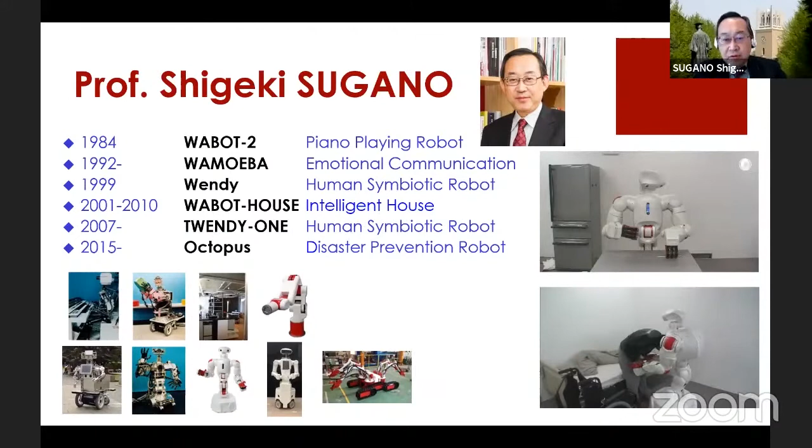I have developed so many human symbiotic robots so far. Now, in the Moonshot project, I will make a great jump from these kinds of robots.

As you know, there are so many kinds of goods - cellular phone, camera, game machine, PC, etc. But now we have the smartphone. In the case of robots, it's the same situation. Now we have many kinds of robots, but in the near future, by 2050, we will have some smart robot.

So we now set the autonomous level for smart robots. As you know, in the automobile there is autonomous driving, with levels 0 to 5. In autonomous robots, it's almost the same situation - level 1 and level 2 are routine autonomous, cooperative autonomous, semi-autonomous, and fully autonomous.

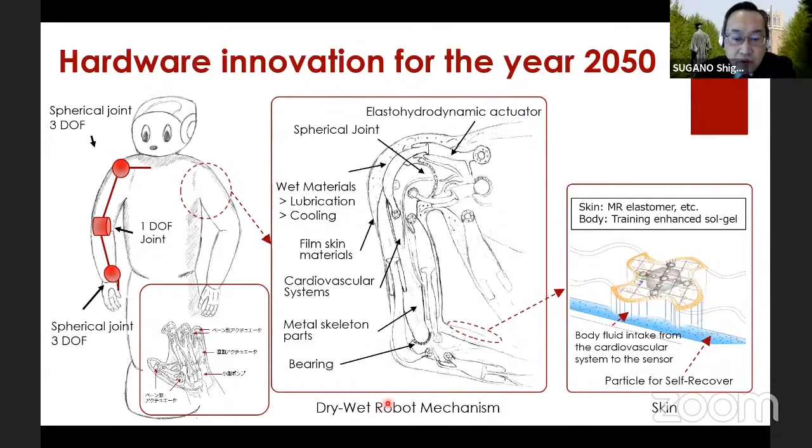So about the hardware innovation of the year 2050, it's an example we are now designing. It includes an elastohydrodynamic actuator and spherical joint, wet materials, probably including some elastomer, and it's some self-recover system. It's also included - we call it a dry-wet robot mechanism. Conventional type robot is all dry robot. Now we realize a dry-wet hybrid robot mechanism.

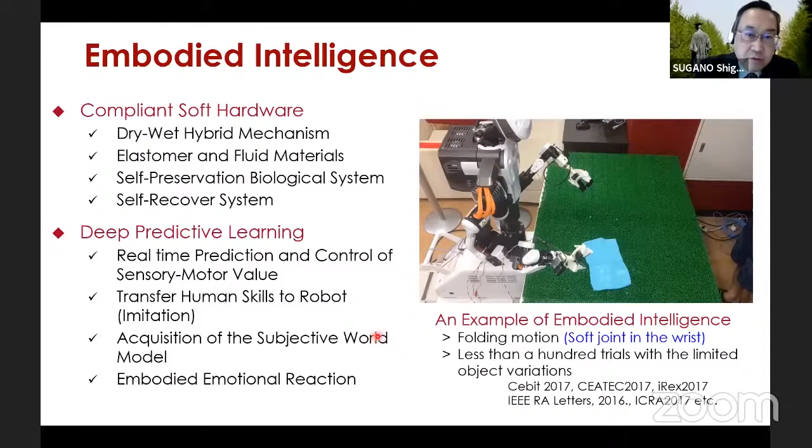There is an input of sensory stimulus, and it makes a prediction error. But the main point is this hardware system. So finally, probably it makes here the self-preservation biological system, and deep predictive learning is combined. Then we can bring the new AI embodied intelligence.

The another important point is evaluation of social needs and acceptability. Now it is very difficult to have field experiments all over the world, so there is a limitation that specific robots or experiments happen in specific regions only. We should have discussion on international standards, but that is now rare. So this is a problem now.

So we try to realize this process by 2023, to understand needs for standard design. It's a quantitative survey - a comparison survey from 10,000 young people, Generation Z in Europe, US, and Asia, and we try to cover 3 to 8 countries. This is a very important investigation to identify what is important to design the new AI robot. By 2025, we get feedback and hold the international symposium on AIREC. By 2030, establish a path for social implementation, including international cultural differences. Then we bring this knowledge and experience to reflect in the design of the AI robot AIREC.

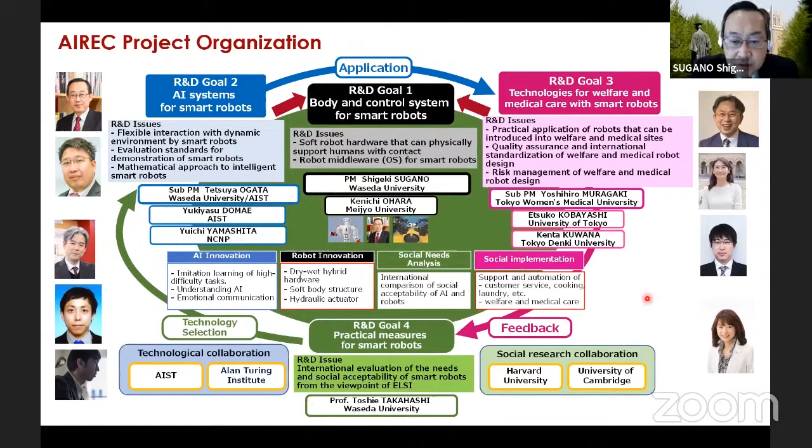So please see this slide. There are AI innovation - robot innovations, social needs analysis, and social implementations. So that is a plan toward 2050 in the hardware innovation, social implementation, and social survey. So that's all. Thank you very much.

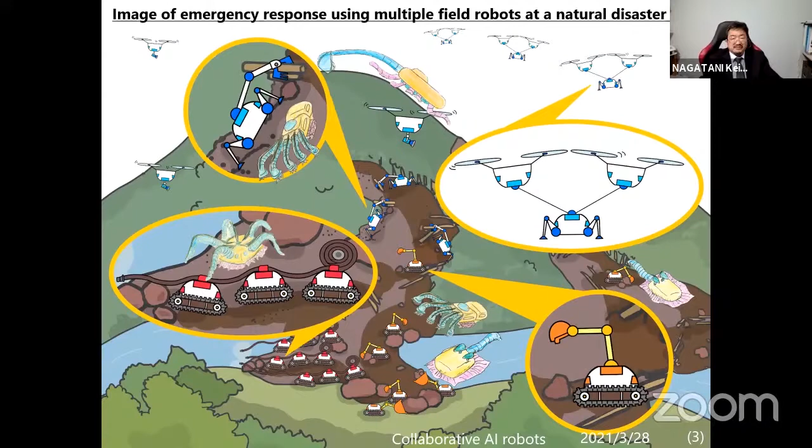This illustration shows an image of emergency response using multiple field robots at a natural disaster site in 2050. Robots obtain sensing data to understand the environment, conduct collaborative works to respond to unexpected situations, and perform disaster response.

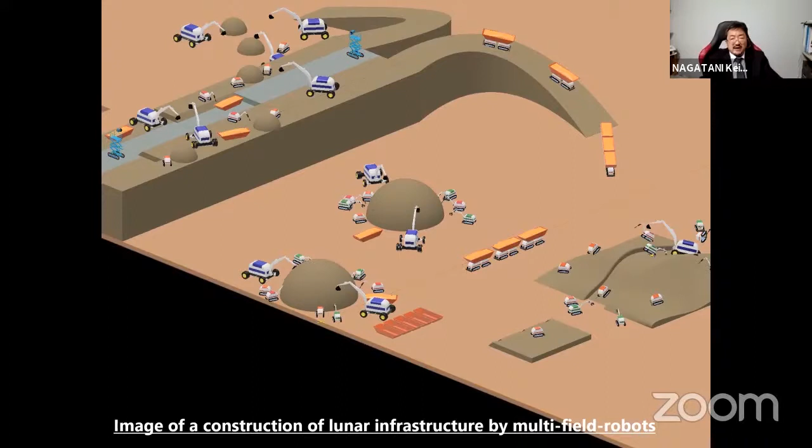This illustration shows an image of infrastructure construction on the moon in 2050. Multiple field robots autonomously perform collaborative work to build infrastructures while responding to unexpected situations.

I would like to explain a little bit about the difficulty of realizing field robot systems. In current mainstream approaches to robot design, firstly the situation, or environment, is assumed. Then the hardware and software are designed according to the situation. After the robot is deployed in the target environment, it executes the task by optimal motion planning.

During the execution, the robot obtains sensing data and adjusts its motion to perform the task robustly. We call this approach closed design. This approach is effective for robots in factories, and the application of the robot is expanding in the world.

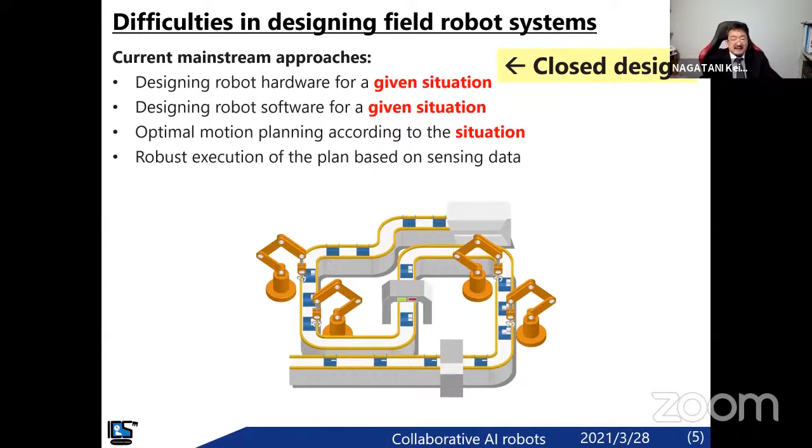On the other hand, this approach does not work well for field robot systems in case that the target environment is a disaster site or even a construction site. According to this approach, it is necessary to design the hardware and the software for all possible situations. After the robot is deployed in the target environment, it executes the task by planning result according to the situation.

The key is to understand the situation by robots in an ever-changing environment. During the task execution, the robot's motion should be conducted based on sensing data. However, in the field, much higher sensing ability is required than in a factory. Therefore, a robot with a closed design is expected to fail.

That is because it is difficult to predict the boundary conditions of the target environment at the robot design phase. Therefore, the design problem is not closed. In the design issues for disaster response, the time, place, and scale of the disaster cannot be determined. It is difficult to grasp the situation because of an ever-changing environment. The solution is not simple, and there is no right answer.

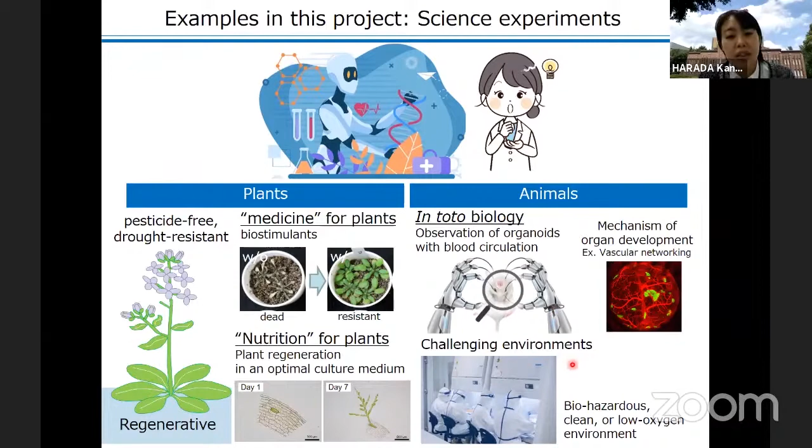And for the animal study, we propose in toto biology to observe organoids, the small mini human organs, under blood circulation condition, to study the mechanism of organ development or the development of new medicine in a challenging environment like a biohazardous environment, super clean or low oxygen environment.

So in the next 10 years, we are going to develop a science AI robot team for science experiments on plants and animals in a challenging environment.

Let me summarize the challenges for this science AI robot team. First, it should work in a challenging environment where people cannot stay or do not want to stay long, like a biohazardous clean environment. We expect large individual differences in samples, and manipulation adaptive to changes in the samples or environment is required.

It's often true that the number of available samples is limited, and we need to discuss ethical issues, in particular for experiments on animals. It's also often true that only a limited time duration is allowed for experiments on plants and animals. The robot needs to manipulate small, soft, and deformable samples in a wet condition. And scientists often use qualitative metrics for evaluation, like 'it's good' or 'bad' or 'terrible'.

Looking at these items, we notice that they are not only for the science AI robot, but are common in many robotic applications, including the surgical robots I have been studying for years. So let me discuss a little bit more in detail.

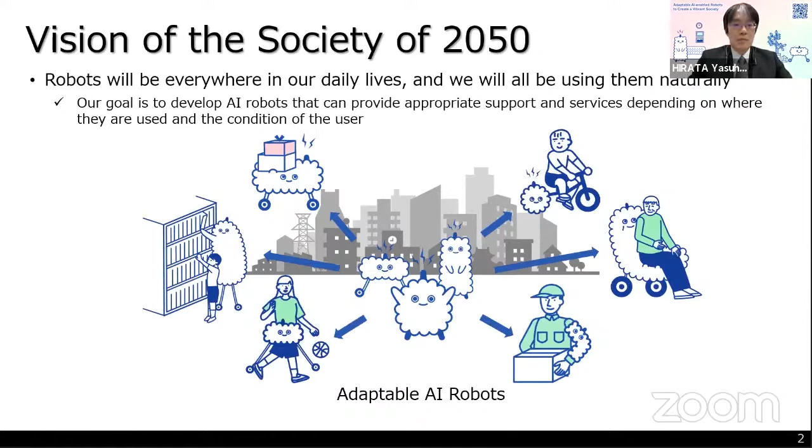Adaptable AI robots will be used not only in homes, but also in commercial facilities, cultural facilities, sightseeing spots, sports facilities, nursing homes, hospitals, child care facilities, and many other places as part of the infrastructure of society. We aim to envision a smarter, inclusive society where everyone lives a healthy life by coexisting with AI robots, a society cultivating the feeling of 'I want to do' or 'to be' something, and fulfilling it using AI robots.

So in order to realize a new life with AI robots, we have set up 3 major research topics. The first is AI-related research to design how robots should behave in order to provide appropriate assistance and services to humans. The second is research on robot hardware to provide safe and appropriate assistance to humans. The third is research on social implementation, where AI and robot hardware mutually evolve and AI robots can be used in everyday life. So today, I'd like to briefly introduce these 3 research topics.

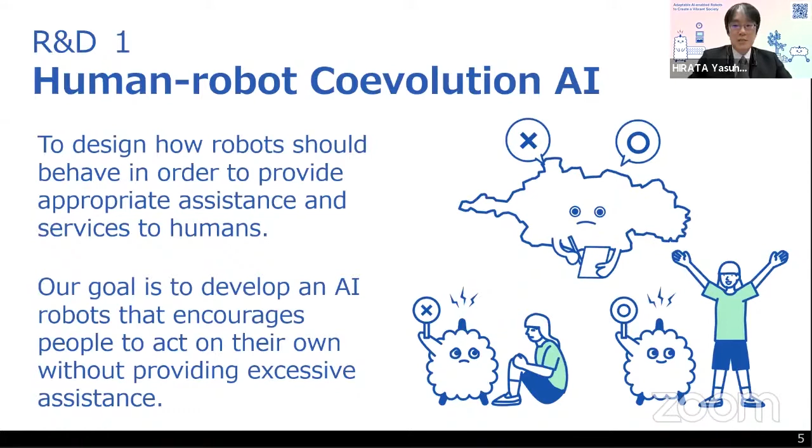So first, I'd like to explain our research on AI to design the behavior of robots. Our goal is to develop AI robots that encourage people to act on their own without providing excessive assistance. For this purpose, we focus on the concept of self-efficacy in this project. Self-efficacy is the expectation of how well you can perform actions necessary to produce a certain result, and the recognition of the possibility of your own action.

If self-efficacy is low, a person hesitates to try new things, thinking that I cannot do it, or that I might cause trouble for others. On the other hand, if self-efficacy is high, a person tries new things, thinking that I can do them by myself. The aim of this project is to find out a mechanism of change in self-efficacy, feeling like I may be able to do it, or I will try it. Along with this approach, we aim to set appropriate goals for each task for improving self-efficacy and to design behaviors of AI robots.

There have been several studies on improving self-efficacy, but most of them focus on short-term human observation and assist, dealing with limited tasks. On the other hand, we want to develop an AI robot that can improve self-efficacy through long-term observation of the user and encourage him or her to take on new challenges.

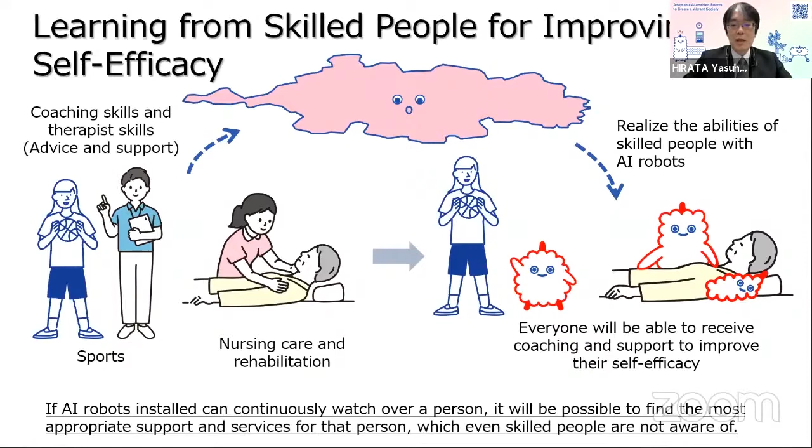Furthermore, if multiple AI robots installed in various places can continuously watch over a person, it will be possible to find the most appropriate support and services for that person, which even skilled people are not aware of.

The second research topic is the hardware of adaptable AI robots. Our robots are designed to provide services to people of all ages and physical condition, and to be adaptable for many purposes. In order to achieve this goal, a single robot with a fixed shape may not be able to provide sufficient support. Therefore, we aim to develop adaptable AI robots that can change their shape and form according to the user's condition, environment, and the purpose of the task, and provide appropriate assistance to encourage the user to take independent action.

So in this project, we propose a new concept called robotic nimbus. You may be familiar with the flying nimbus, which is a cloud-type flying vehicle that appears in the Dragon Ball manga. The word nimbus means a splendid atmosphere or aura surrounding a person or thing. The concept of our proposed robotic nimbus is to assist the user's proactive actions naturally while transforming into various shapes like a cloud and gently enveloping the user.

Although we would like to develop various robots based on the concept of robotic nimbus in the future, first of all, we will develop nimbus holder, nimbus wear, and nimbus limb. The nimbus holder gently and firmly supports humans, aiming to support stable movement by restraining the movement of upper and lower limbs, and to support walking and standing of people with lower limb disabilities.

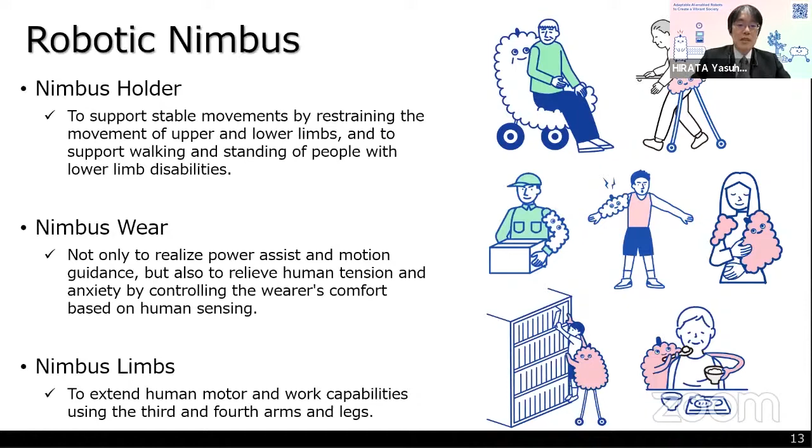So currently in Japan, the concept of a future society called Society 5.0 is being proposed. Society 5.0 represents a society in which cyberspace and physical space are highly integrated. While cloud computing in cyberspace is progressing, we aim to realize a cloud that enables safe and secure interaction in physical space, that is robotic nimbus, as a social infrastructure.

So finally, the third research topic focuses on how to implement the proposed adaptable AI robots that improve self-efficacy in society.

So in order for AI robots to be accepted by humans and society, it is important to obtain a social consensus on how to control the robot from the perspective of ethics and law, as well as personal information protection. It is also necessary to establish safety evaluation standards for adaptable AI robots so that all people can use them.

In addition, the fact that AI robots are installed everywhere as part of social infrastructure means that people don't always use the same AI robot. We aim to develop technology to share the experience of user-AI robot interaction with other AI robots, so that even if the AI robot has a different form or function, the user can recognize it as a usual AI robot that knows him or her well.

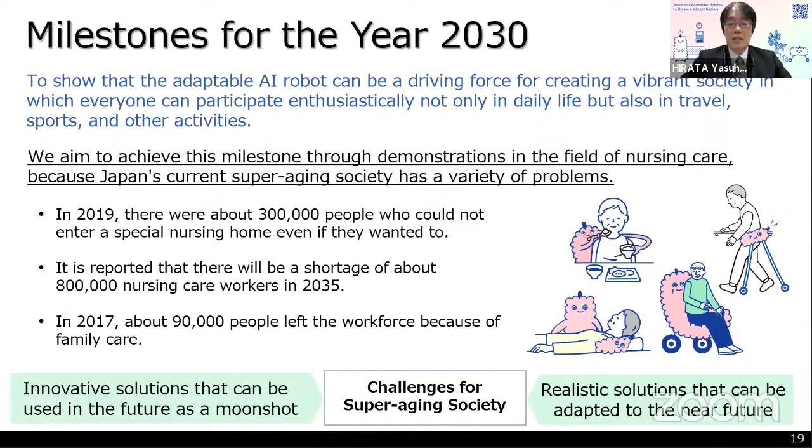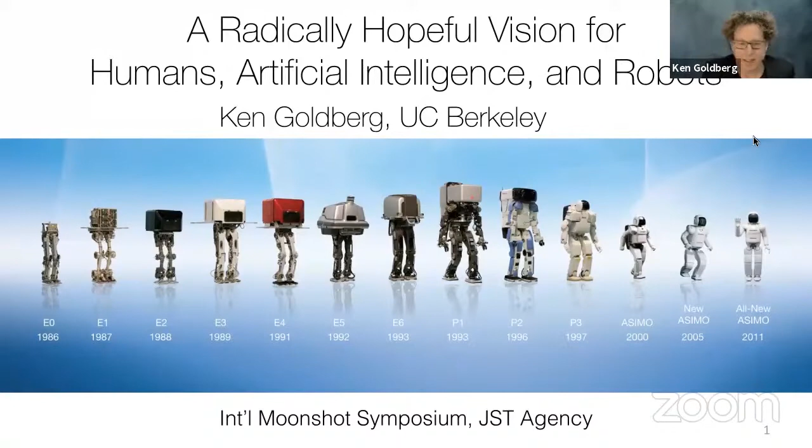Thank you, it's a pleasure to be here. Can you hear me okay? Can you see the slides? Yes, please. Okay, very good.

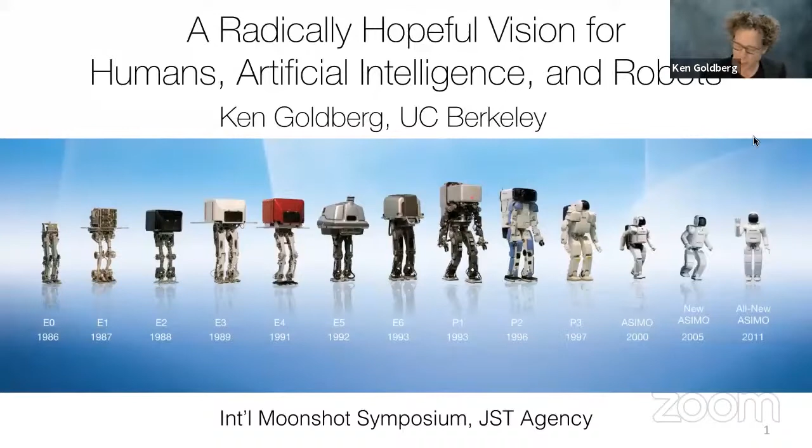So what I'd like to do, in honor of this wonderful kickoff of this new program, is to talk about what I believe is a hopeful vision for humans, artificial intelligence, and robots in the year 2050. This evolution has been going on for many years. In fact, this year we're celebrating the 100th anniversary of the word robot, which was coined in a Czech play in 1920. And as other colleagues have mentioned, there's been enormous progress.

In fact, in the last decade, work on deep learning has made a major advance in artificial intelligence, and it's due to massive data sets, computing, and new algorithms under the title of deep learning. Everyone's aware of the major result when the system AlphaGo beat the world champion at the game of Go, and it was hailed as a major breakthrough.

It's also important to remember that this was a very complex game with a very large branching factor, but it's also a game, meaning that there is a lot of complexity, but the state of the board is fully observed. It's known perfectly. It's a 19 by 19 grid, and it's a trinary state environment, so each cell is either empty or has a black or white stone.

So we know exactly what the state of the system is, and it's stationary. It waits for the opponent to make a move.

I want to contrast that with the complexities we're talking about today, which is the real world, where we have vast amounts of complexity, where the environment is much bigger than a 19 by 19 grid. The complexity of each cell is far more than just trinary, and the system is dynamic and highly uncertain. So it's really important to keep in mind that games are not reality, and reality is still a very, very difficult objective.

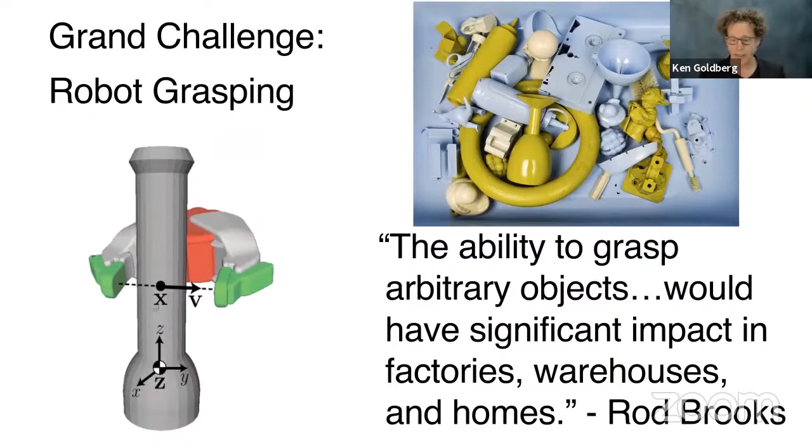Now, there have been major advances in computer vision. We can now see things, robots can now see things that they couldn't before, and this has been very, very exciting. The ability to label objects was largely due to the existence of data sets, very large labeled data sets in computer vision.

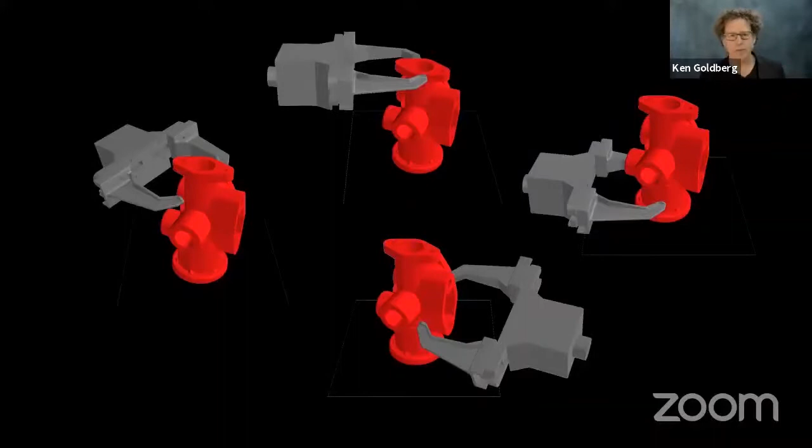So we've been looking into the analogy of: could we come up with very large data sets of labeled objects for grasping? This is the idea behind the dexterity net, or DexNet—not ImageNet, but DexNet—that my students and I have been working on. The idea is to mathematically study each of the objects in that data set, then look for optimal grasps that are robust to small perturbations, the inevitable uncertainty in position, orientation, and uncertainties in the mass of the objects and the friction properties.

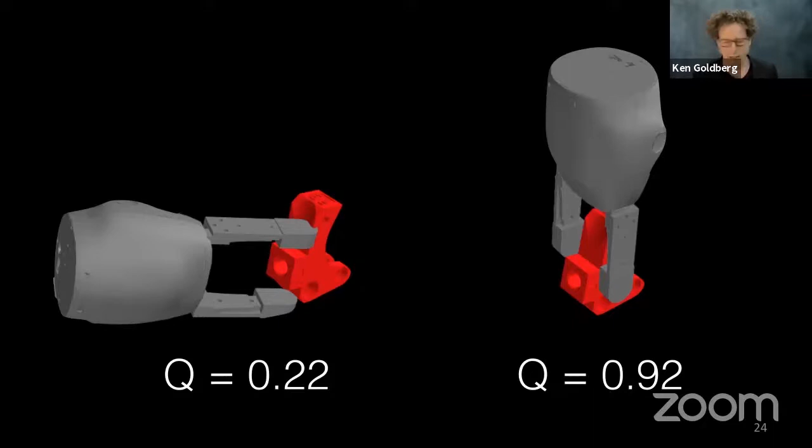We can use Monte Carlo integration to take all those samples in simulation and come up with predictions of how reliable different grasps are, how robust they will be in practice. The one on the left is not very robust, the one on the right is much more robust. This is the result of our system.

It's been running on a number of different scenarios. These are objects it was not trained on, but using deep learning, it has been able to generalize and pick up new objects with very surprising degrees of reliability. This is DexNet in action.

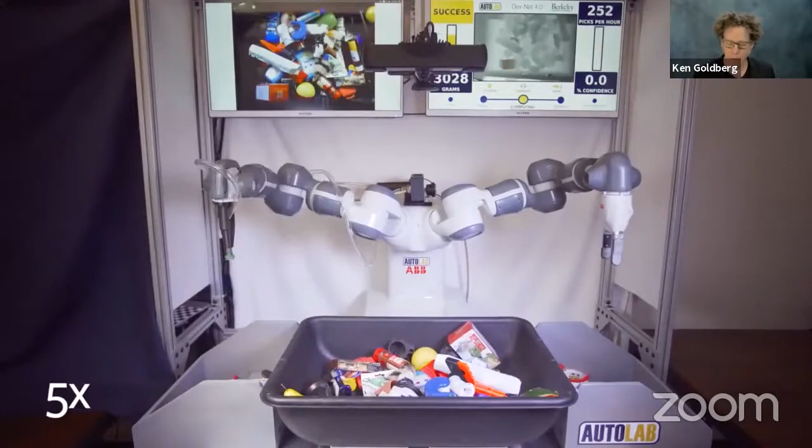It's not working all the time, but you can see the numbers in the upper right conveying its progress, how it's doing over time. It's also making use of depth sensing, which is another major advance.

Now, I also want to mention the technology of 5G. 5G networks are growing all over the world, increasing speeds and robustness, throughput and latency of networks. This is combining with the Internet of Things, which is growing for many devices—not only robots, but sensors and small actuators being placed all around our environments. These come together with robots in what is sometimes known as cloud robotics, a term coined by James Kuffner at Google.

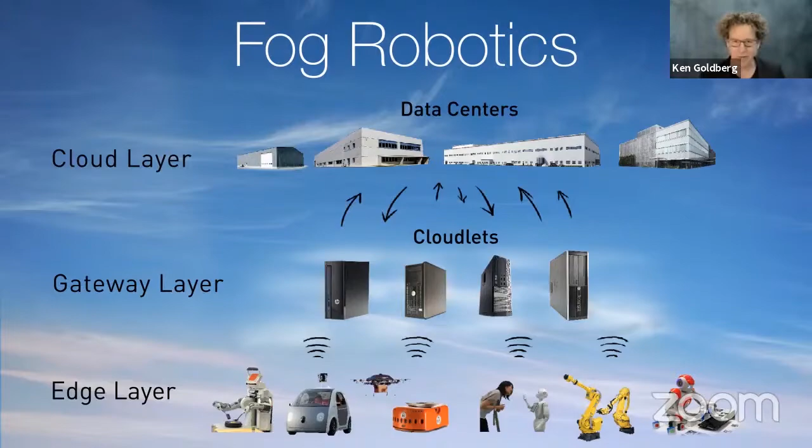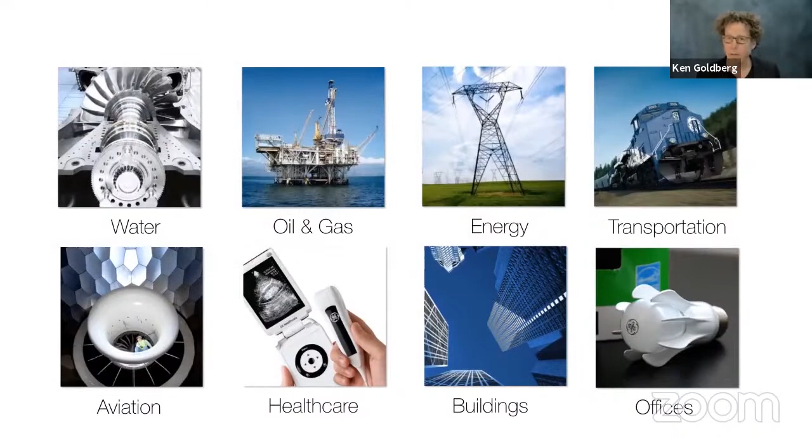The idea is that we can make use of data in the cloud and cloud computing so that all the computing doesn't have to be done on board the robot. We're interested in taking this a step further because computing is not either all in the cloud or all on the edge, but in all kinds of layers in the larger infrastructure. So we call it fog robotics, a hybrid of robots in both places. This is very exciting, combining Internet of Things, 5G, and fog robotics together in the coming decades, and I believe it will have impact in many different industries around the world.

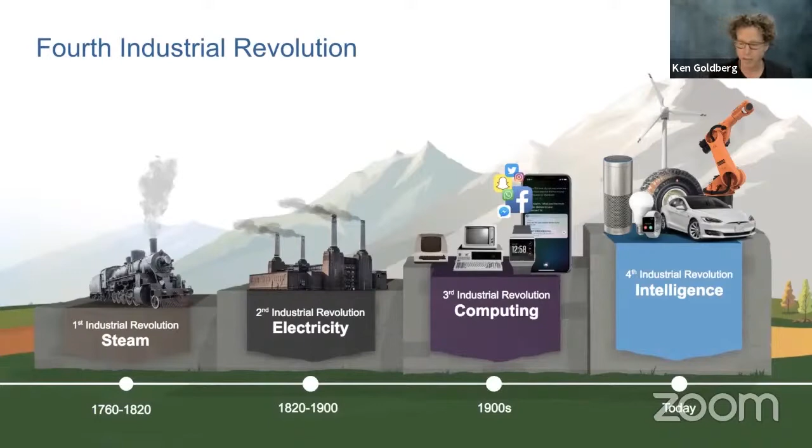There was a lot of talk about the fourth industrial revolution, which is now going to be realized in the context of intelligence, but I also believe it's going to involve humans at all levels.

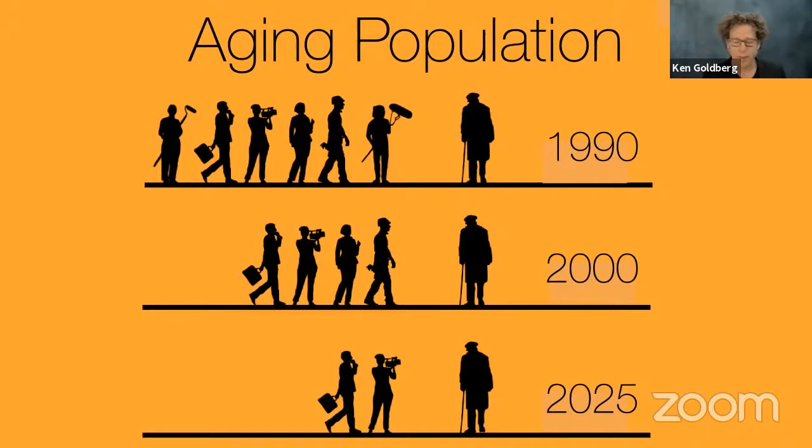Now let's talk about deformable objects. In the context of our aging population, Fukuda-san mentioned that we have an aging population in all countries today; in Japan it's very acute. Soon we'll only have 2 working people for every retired person, which puts a lot of pressure on the system and society. But if we had robots that could go in and keep our homes tidy, it would be very appealing for our well-being, peace of mind, and safety, since you can trip over objects and hurt yourself, especially as a senior citizen.

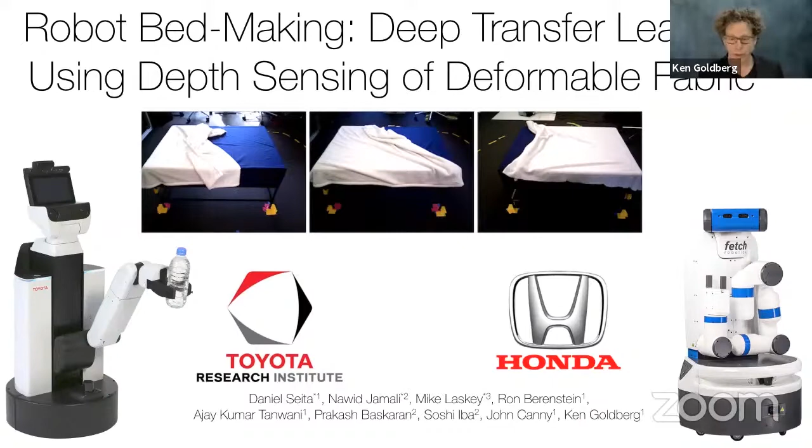This is not impossible, though the system is still a prototype. The challenge is how do we pick up and manipulate soft objects like bed sheets. We've been doing a project with Toyota and Honda on making beds, using depth sensors and deep learning to find pick points for the robot gripper to effectively make the bed. We've been learning through examples, and here's a quick example of the system making a small scale bed. We're making progress and I think we'll see more in the next decade.

We've also been looking at untangling things like ropes, untying knots, and organizing clutter into neat arrangements. Here's an example of a robot untangling a fairly straightforward knot, and we've been able to do this with very high reliability.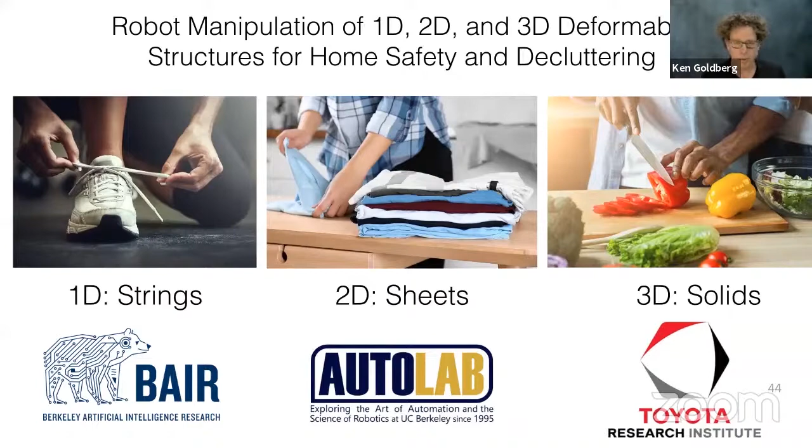We're also just starting a new program with the Toyota Research Institute, a 3-year program to look at 1-dimensional deformable objects like strings, 2-dimensional objects like sheets, and 3-dimensional objects like solids, and being able to manipulate those with robots, which are still frontiers of challenges right now.

I want to end by saying artificial intelligence is very exciting and has great potential, but it's also important, as we've discussed today, that it relates to intelligence amplification of our human skills, the self-efficacy that Harada-san mentioned earlier. This is because humans and robots are complementary: machines are very good at precision and calculation, but humans are still very good at understanding, empathy, and dexterity. This complementarity makes a lot of sense and is very natural in Japan, where the idea of Astro Boy and robots as friends and companions has a long and rich history.

We've been thinking about how this relates to enhancing diversity in populations, that robots can allow us to do what we're uniquely meant to do: focus on high-level thinking, strategy, and paving the way for innovation in the future. So these are some moonshots I have in mind, and I'm looking forward to discussing with the other panelists. I'll also mention that I believe there will be great advances in robots for surgery and agriculture. Thank you.

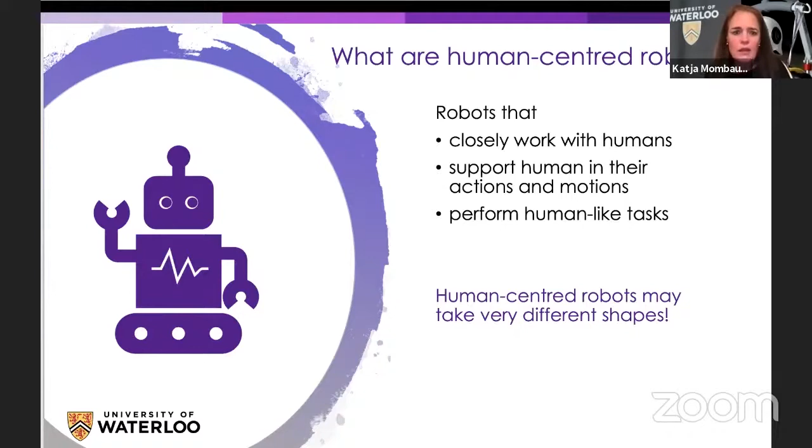So what are these human-centered robots I'm talking about? I would define them as all the robots that closely work with humans, that somehow support humans in their actions and motions, and so that work on humans, or that perform human-like tasks. These human-centered robots may come in very different shapes, and they may have very different functions and tasks.

One of the visions is that human-centered robots can support and facilitate people's lives in many areas. For example, they should be able to replace humans in dangerous, remote, and also monotonous tasks. We already saw a few examples of that in the previous talks, for example robots helping in disaster recovery, performing work in space, to name a few very remote and autonomous tasks, but they are also supposed to help in airplane and ship manufacturing.

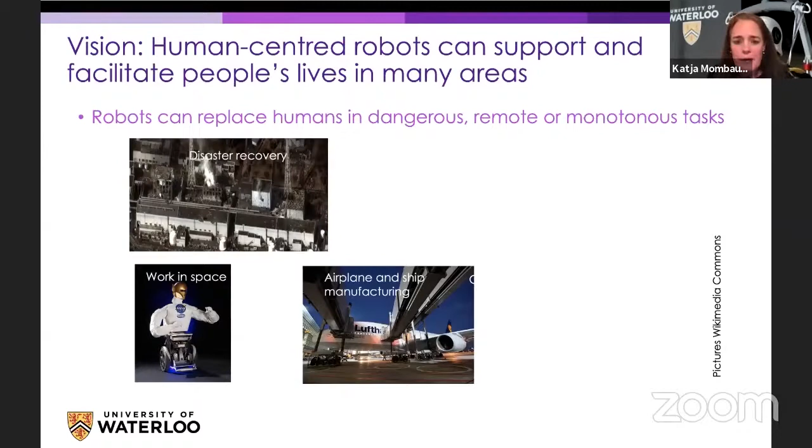But there's also a completely new set of dangerous tasks that just came up in the past year related to the COVID pandemic, and there the danger came from being close to humans. So robots could also have taken over some of the jobs in care and nursing, but also in medical testing and anamnesis to keep medical personnel safe. These tasks range really from very remote standalone tasks to very close interactions with humans, which robots could take.

On the other hand, human-centered robots can support people's lives by enhancing human mobility and well-being, by supporting humans in many ways to help them lead an independent life. We also heard examples for that already. This ranges, and relates to robots of very different shapes from the ones we saw before.

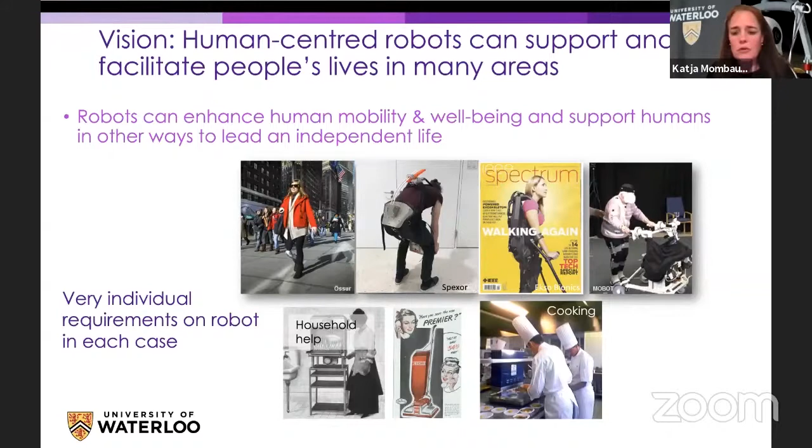So these are exoskeletons, prosthetic technology, assistive mobility devices, which really have to satisfy very individual requirements for each of the persons. But that also includes all kinds of household helpers or other kinds of companion robots helping people to be independent at home.

So in order to do that, the robots have to intelligently interact with humans, learn to collaborate with humans, assist and support human movement, and also predict the consequences of their actions. They have to explore unknown environments, and they also have to interact with the environment.

So what kind of intelligence do human-centered robots need for these tasks? Of course, for each of those tasks, a specific artificial intelligence in the classical sense is also required. For any of the medical tasks or manufacturing tasks, specific skills are required to perform the actions and sequences. But one thing that is common in all these cases is that the robots require motion intelligence.

They need the ability to perceive the environment and interact with the human partners. They need cognitive skills to understand what they perceive and also take decisions about what to do next. They need the ability to predict or anticipate what the human will be doing next. They need a strong motion ability, so they have to be strong enough, fast enough, efficient enough, stable enough to perform the motion, and that's still one of the big challenges right now in robotics.

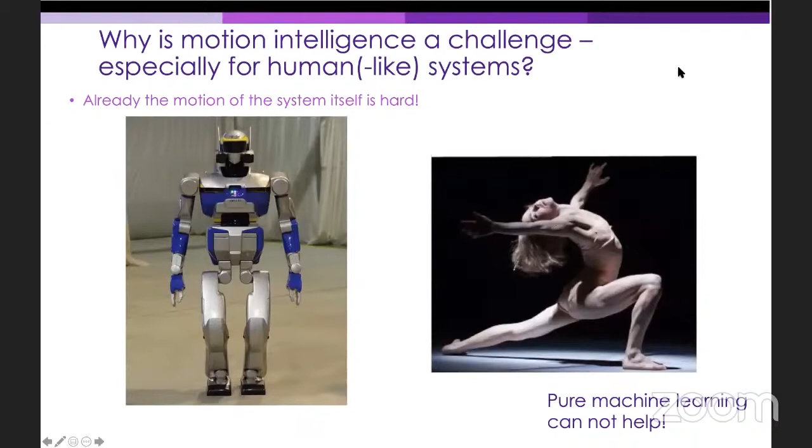Sorry, your slide does not change. Please check your computer. You don't see my slides? Oh, that's okay, you didn't see any slides? So current slide is titled Motion Intelligence, a Challenge. The slide doesn't move. Okay, should I maybe stop sharing and then share again? I'm sorry for that.

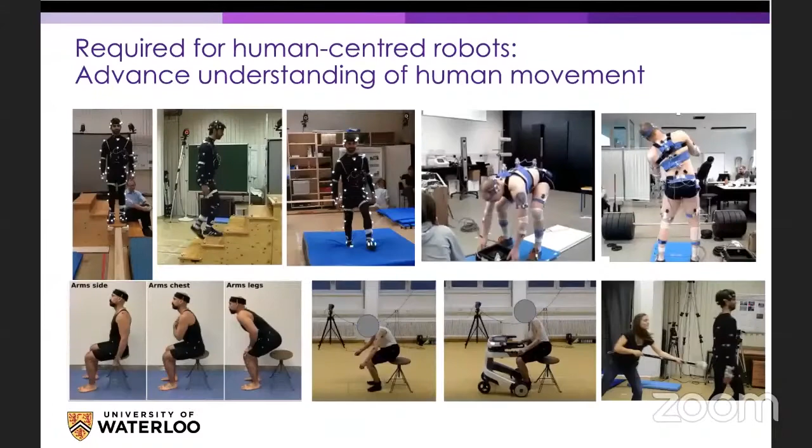Can you see it now? Not yet. Yes, okay. Okay. So yeah, okay. So I've shown you all these slides. Yeah, please go ahead.

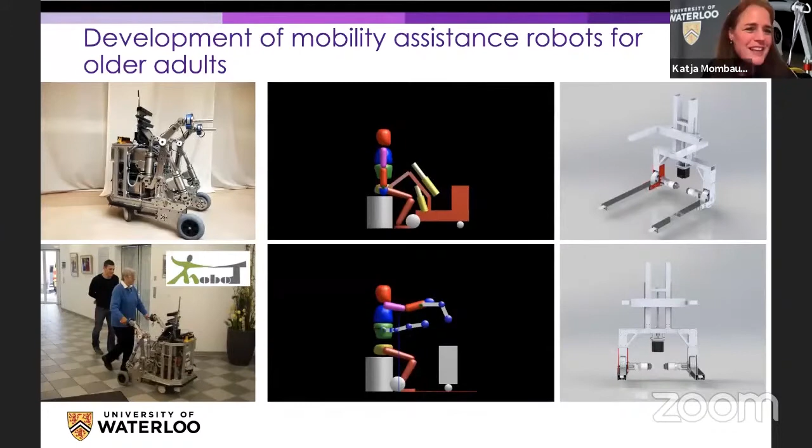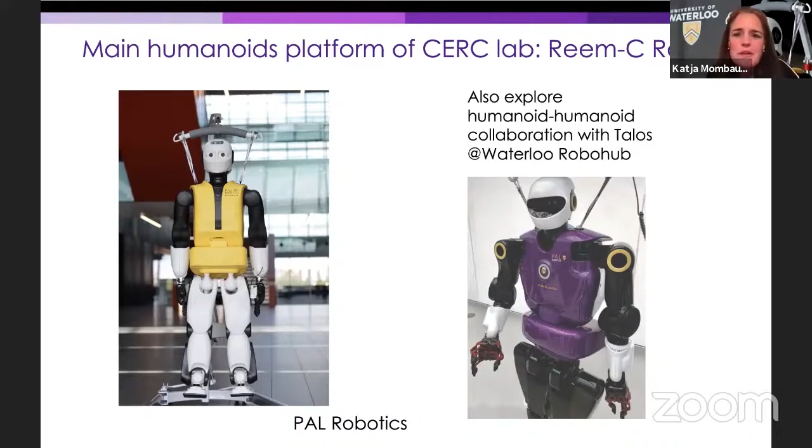Okay, I will continue where I was. Unfortunately you didn't see all the assistive devices I was showing you. But we also work with humanoid robots and are trying to teach them to move on different terrains, and develop benchmarks to evaluate how robots can move or act in the real world.

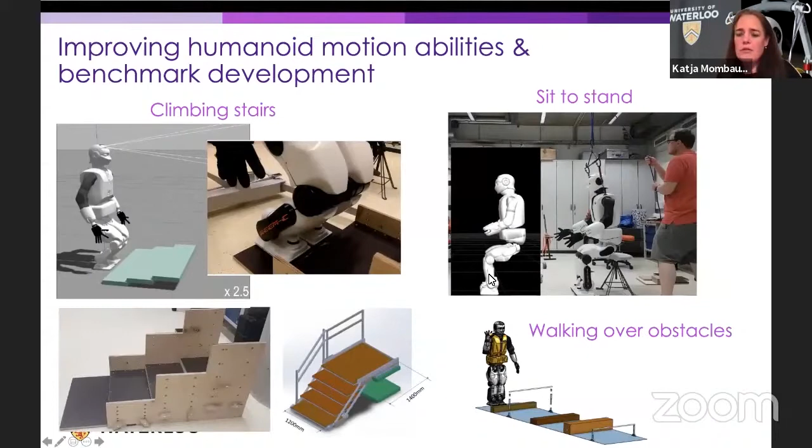So we are developing controllers for stair climbing, but also for standing up from sitting, for walking over obstacles. We are also developing manipulation controllers for having robots manipulate objects, grabbing objects from shelves, carrying them around. We also work on controllers and tests for evaluating the stability of walking, which is one of the crucial aspects.

One thing we think is really important is physical, social, human-robot interaction. There are many examples for which we need close physical human-robot interaction over extended periods, for example in the medical field. But we think it's really important to check what it takes for humans to allow robots to enter in close contact with them.

On one side, there's the field of physical human-robot interaction where people are trying to achieve a desired task in a way that is safe to the human. The current state of the art is that a lot of the interactions are still quite distant, and we're looking at joint manipulation, handing over of objects.

On the other side, social human and robot interaction looks at how a task has to be performed to be psychologically and socially accepted by humans, making them feel comfortable. But the current state of the art in social robotics is more about speech and gestures and very distant interaction.

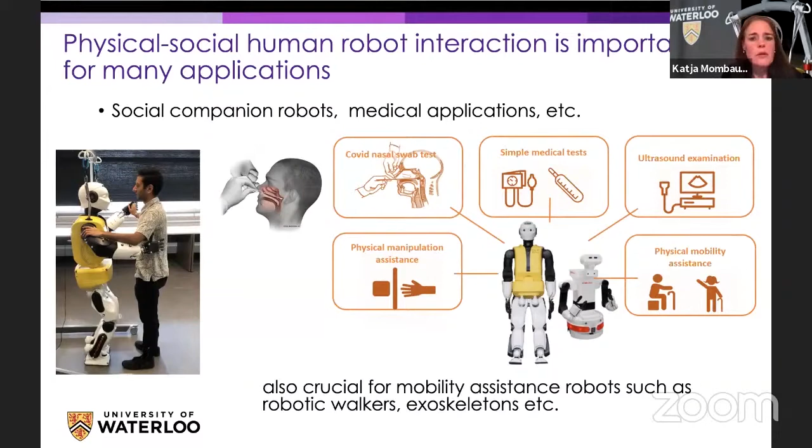So the outlook: human-centered robotics in 2050. I would say that by 2050 we will have all the discussed robotics technologies that can facilitate people's lives. The robots will be able to fully replace people in disaster sites, work in space, and take over the boring manufacturing jobs.

They will be capable of close physical, social, human-robot interaction, and will also be highly adaptive to new situations. In the case of a pandemic in 2050, the robots would take the frontline jobs and help keep medical personnel and patients safe. Of course, we hope there will be none.

We will have specialized robots to support persons with all kinds of mobility problems, allowing them to move autonomously and prevent pain and injuries. And I also would say we will have companion and support robots that allow old persons to pursue an independent life, in addition to the mobility assistance robots mentioned before.

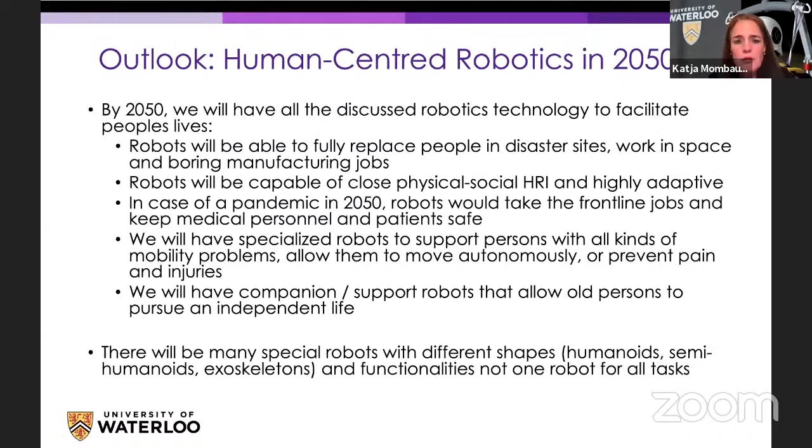So I think there will be many specialized robots with very different shapes - humanoids, semi-humanoids, exoskeletons - but also many shapes we probably can't imagine yet, and very different functionalities, not one robot that can accomplish all tasks. With that, I'm at the end, and I thank you very much for your attention, and I apologize for the technical problems. Sorry for that.

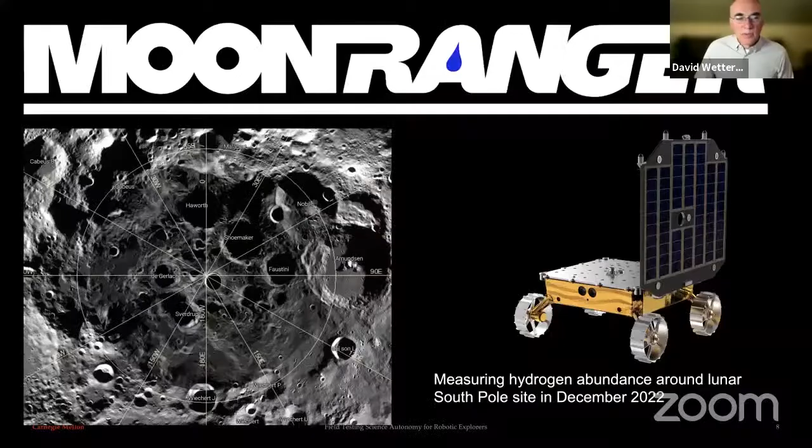We're getting new work here that's producing even more accurate results. I wanted to mention, as was brought up in the introduction, the MoonRanger project. This is a project we're executing at Carnegie Mellon to develop a very small planetary rover, about 13 kilograms, roughly the size of a microwave oven, to go to the South Polar region.

We're working on the landing site selection, close to the South Pole, where we know there's an abundance of hydrogen. What's interesting about this type of robot is that it represents a new class of explorer—smaller but more intelligent than previous explorers, in that it has to navigate autonomously and continuously. It's always going to be moving, recording information about hydrogen abundance, giving us a first look at the distribution of water ice in this one cratered region.

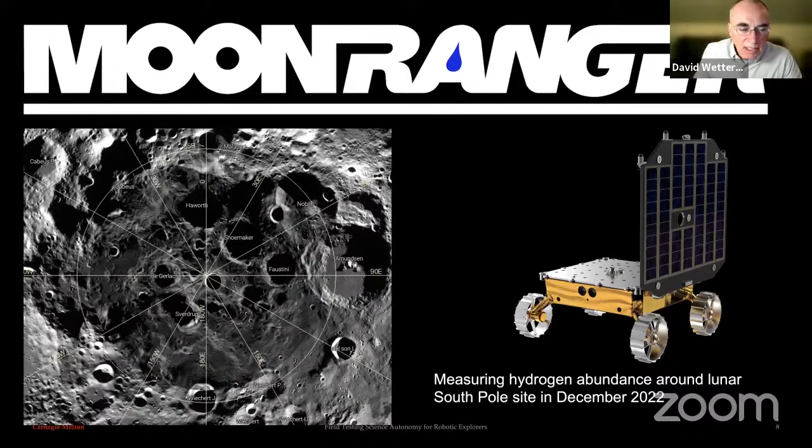It'll be followed shortly afterwards by a few more rovers, more of the class of Curiosity and Perseverance, that will have drills and many instruments on them. But I actually think in the future we will see a shift towards smaller, more intelligent, more independent explorers, as we send more and more systems to the moon and beyond.

In summary, these robotic explorers are evolving from simple data-gathering machines that execute commands to move from place to place and take particular measurements, into truly intelligent agents that perform science. I want to emphasize that this exploration is not just building a geometric map of the world, but building a scientific map of physical properties in the world.

So where will we be by 2050, if we were to speculate? Right now, these robots are able to decide where to go, what measurements to take, and develop a map that is more and more accurate.

However, I think there are still challenges in generating hypotheses. Beyond just mapping the geology of a site, if you want to understand its evolution, or if you want to search for life, how do you generate hypotheses that the robot can then act on in the same way it acts on scientific measurements?

And then once you generate a hypothesis, how do you plan the investigation and collect the evidence? Not just deciding where to go and what to measure, but really thinking in terms of evidence, where you might have a number of different instruments with different informative values relative to what you're trying to model. How do you build up evidence for a particular hypothesis and really test or falsify it?